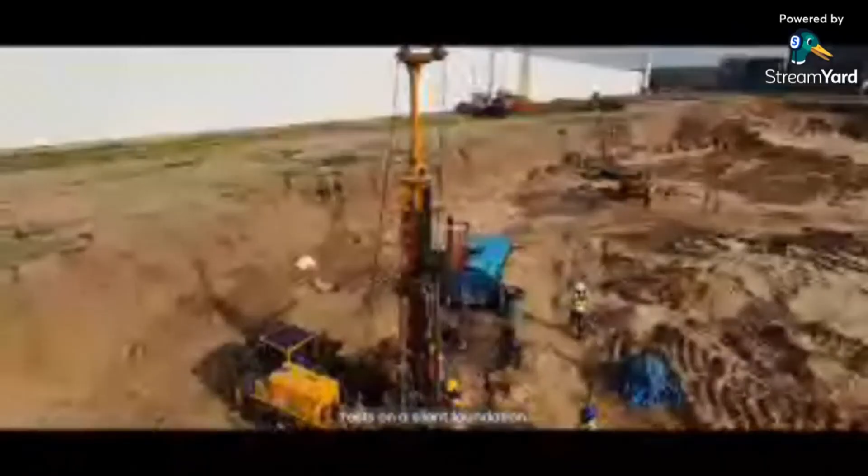Every metro line, every skyscraper, every bridge that connects lives rests on a silent foundation - a foundation that begins deep beneath the surface. And that's where we come in. CENGRS, Smart Geo Technics for better foundations.

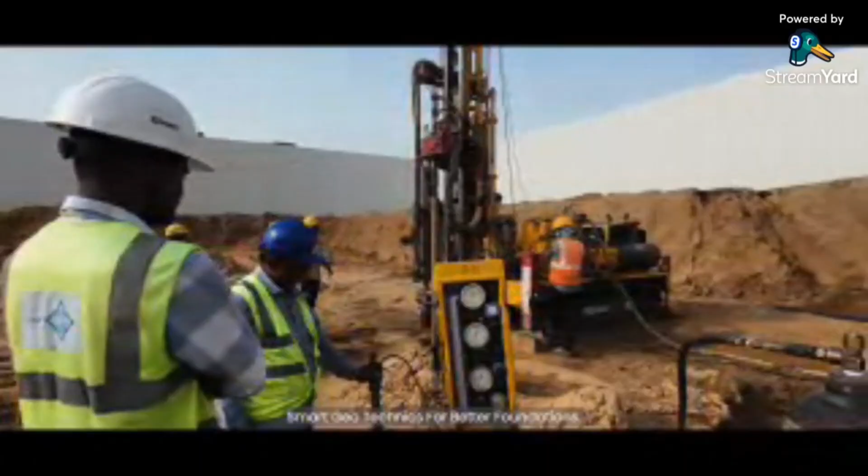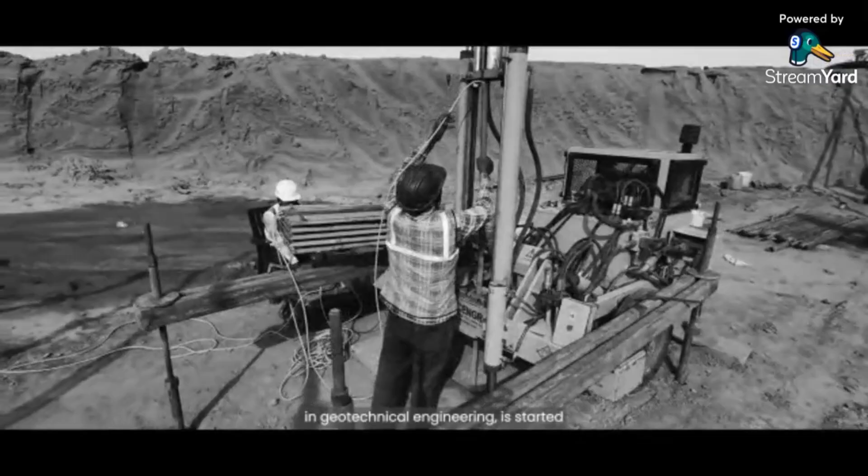Namaskar, my name is Sanjay Gupta. Right from 1971, I was employed in a job as a site engineer, then became a soil engineer, then senior engineer, and likewise. As a young, enthusiastic engineer with a passion in geotechnical engineering, I started as an entrepreneur, founding what is commonly known as CENGRS, that's Foundation Engineers. CENGRS is now 35 years young, with a vision to make geotechnical practice a specialist engineering service. CENGRS has been instrumental in upgrading the code of practices to improve geotechnical practice in society, in an effort to match international practices.

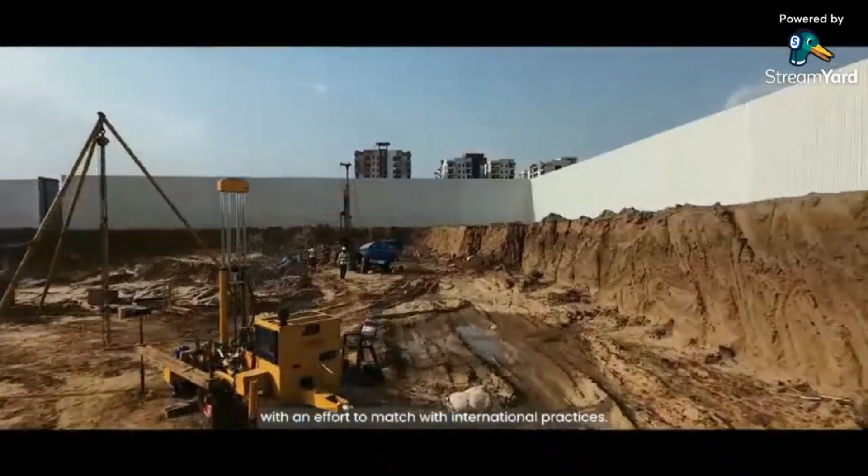Geotechnical engineering is a science, but its practice is an art. I always say something like, be a part of the soil, be its soul. That is what is an achievement, and it gives me the satisfaction.

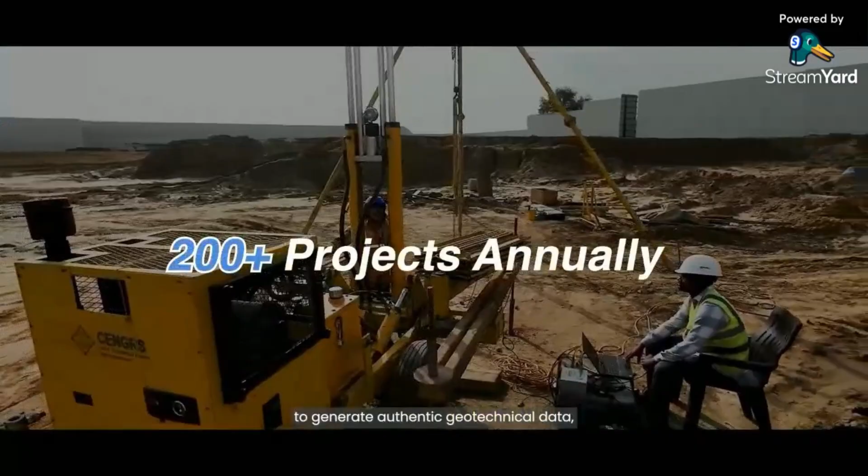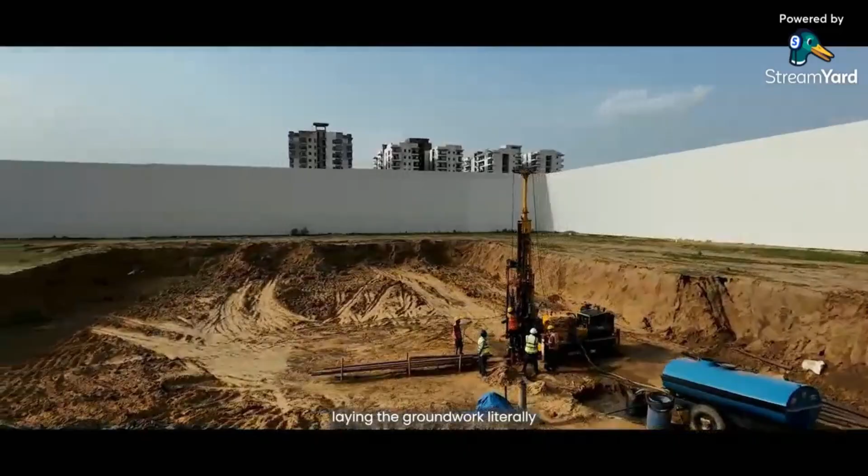CENGRS was built on a commitment to generate authentic geotechnical data, maintaining technical integrity and a deep sense of purpose. Over 3.5 decades, we've partnered with India's most ambitious infrastructure projects, laying the groundwork, literally, working for a stronger tomorrow.

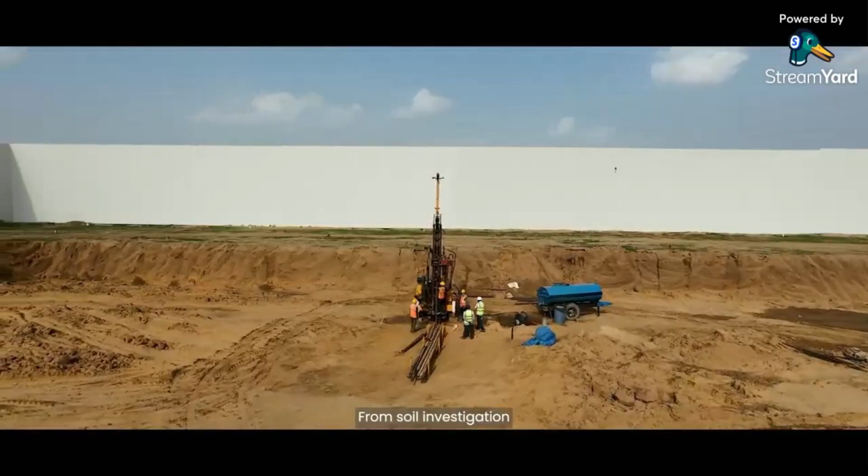I'm Ravi Sundaram, Director of CENGRS Pvt. At CENGRS, we are not just offering services, we are offering quality engineering. Our NABL accredited lab, our ISO certifications, our advanced testing equipment - from soil investigation to foundation testing, each step is backed by thorough and rigorous quality assurance so as to ensure the quality of data is trustworthy.

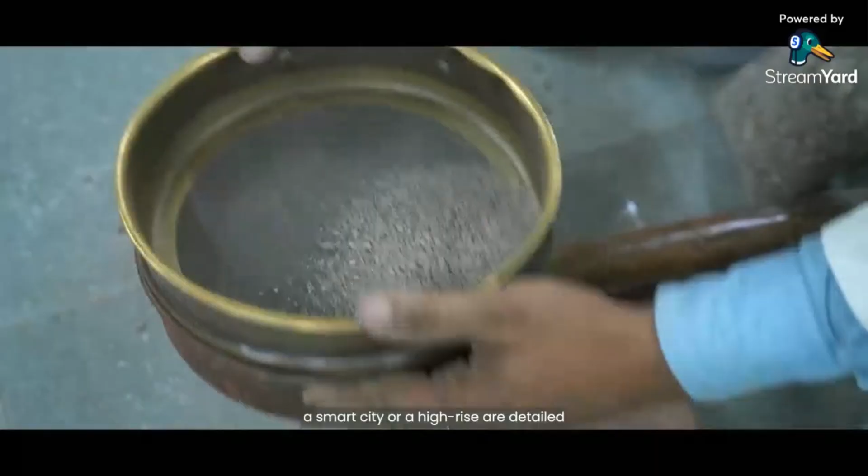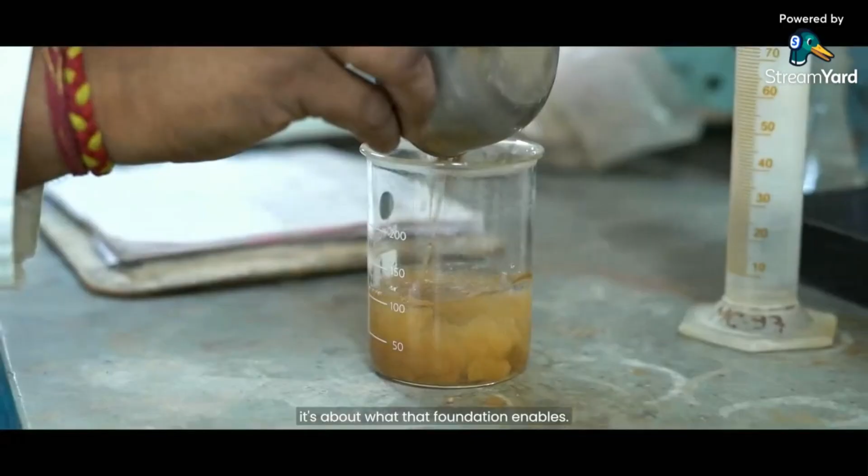Over the last 35 years, we have been building this trust with our clients and in professional circles. Be it a metro line, a smart city, or a high-rise, our detailed, data-driven approach ensures safe, economical, and sustainable construction. It's not just about what's underground, it's about what that foundation enables above the ground.

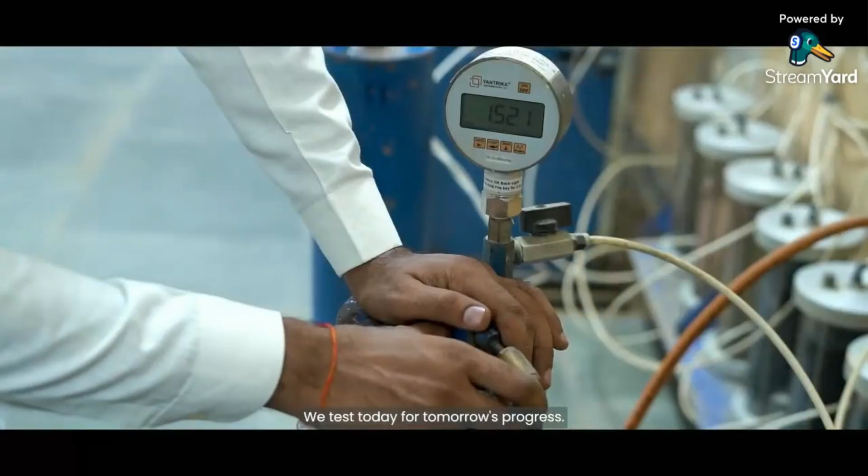Behind every data point is a human being. Our people are the foundation of CENGRS. From seasoned engineers to young interns, every mind here is tuned to solve challenges and deliver value. We don't just work for our clients, we test today for tomorrow's progress. And as the nation progresses, we take pride in our contributions to the projects executed and our humble achievements.

Hello, I'm Saurabh Gupta, Director at CENGRS Pvt. As the market leader, we have decided to transform the geotechnical engineering industry in India and bring it to world-class standards. To do this, we have implemented a system-driven approach so we can deliver consistent quality and on-time delivery for our customers. We are the first ones to bring in the latest ground technologies such as cone penetration test, pressure meter test, cross-hole seismic tests, etc., so we can unlock value and mitigate project risk.

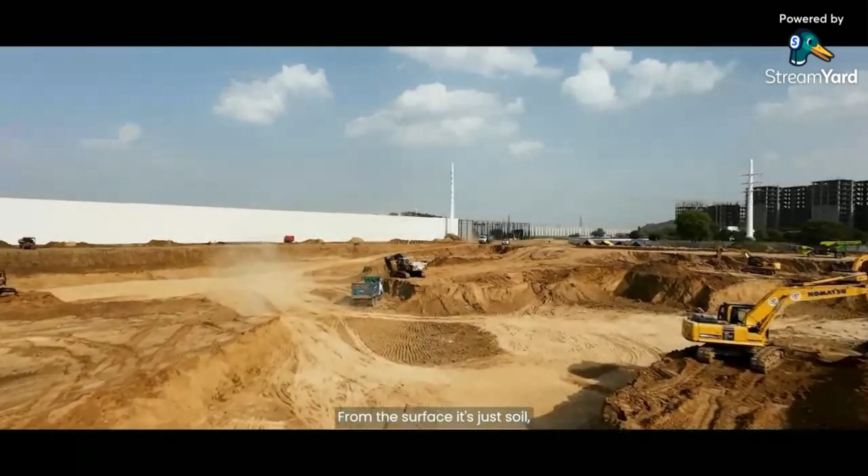As always, smart geotechnics for better foundations. From the surface, it's just soil. But to us, it's the beginning of possibility. CENGRS, Smart Geo Technics for better foundations.

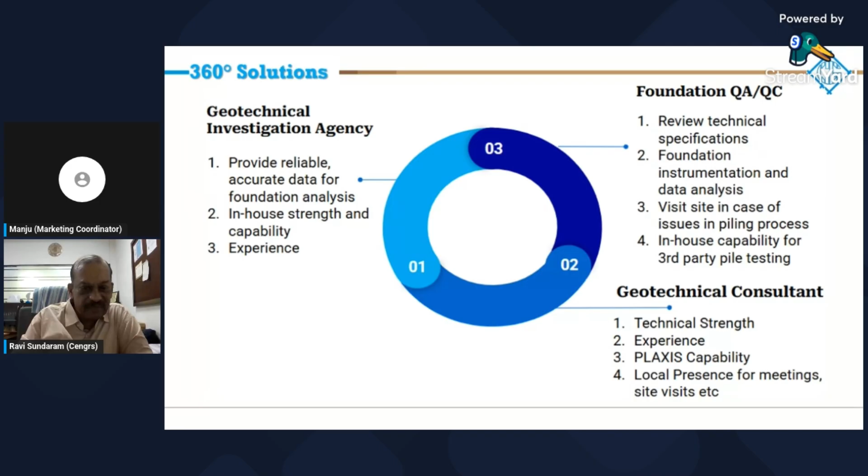We were the first geotechnical testing laboratory to get NABL accreditation, and we have a wide range of tests within our scope, both field as well as laboratory.

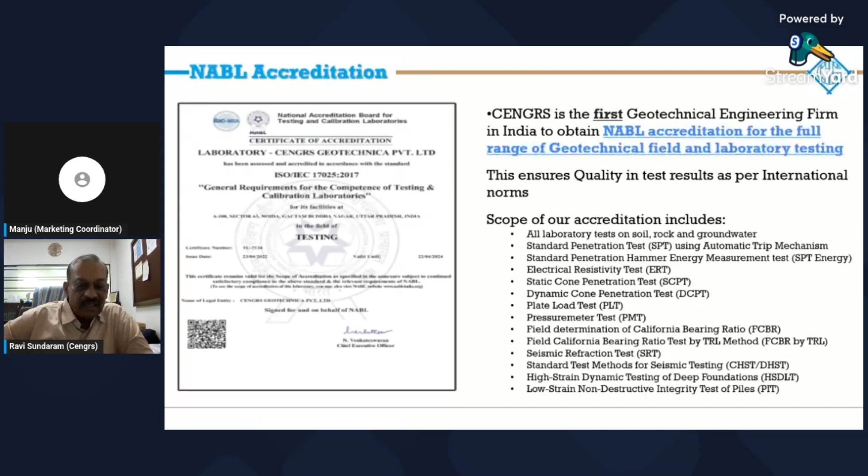We have a pan-India presence. We work all over the country. We have worked in the Northeast, in the South, West - Gujarat, Maharashtra, Tamil Nadu, Kerala, Andhra, Orissa. Right now we are working in Visakhapatnam. There are so many projects on which we are working.

Let us talk about advances in geotechnical investigations. What we have to be aware is that geotechnical investigation is not just about boreholes and SPT. SPT is not all that standard because it depends on the drilling and borehole technique, the type of equipment used, the test procedure, the operator doing the test, how much energy is transferred to the SPT head, the overburden stresses, the ground conditions, and various other limitations of soil sampling and transportation.

There are so many other parameters which influence the results. Now, as India moves forward, a paradigm shift is required in the way we carry out geotechnical investigations, and CPTu has been at the forefront of that.

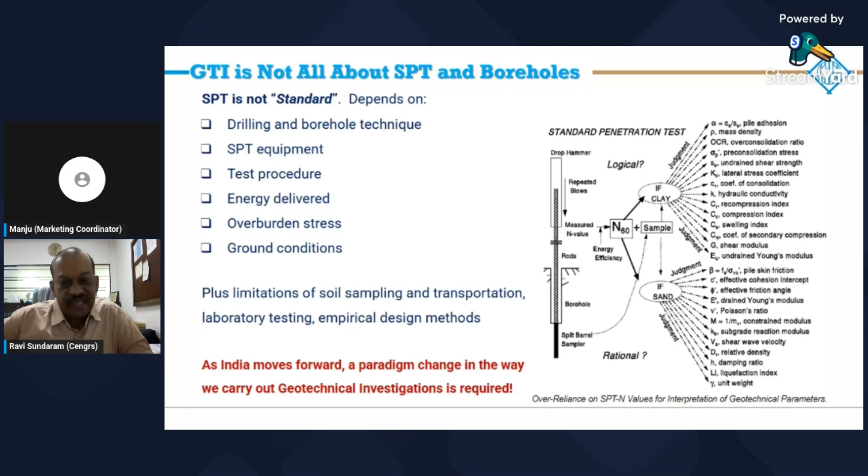In the past two decades particularly, geotechnical practices have undergone revolutionary changes. Conventional boreholes with SPT are now being supplemented with various other tests. The primary one is SPT energy measurement, so that you can standardize the SPT values to 60% energy transfer.

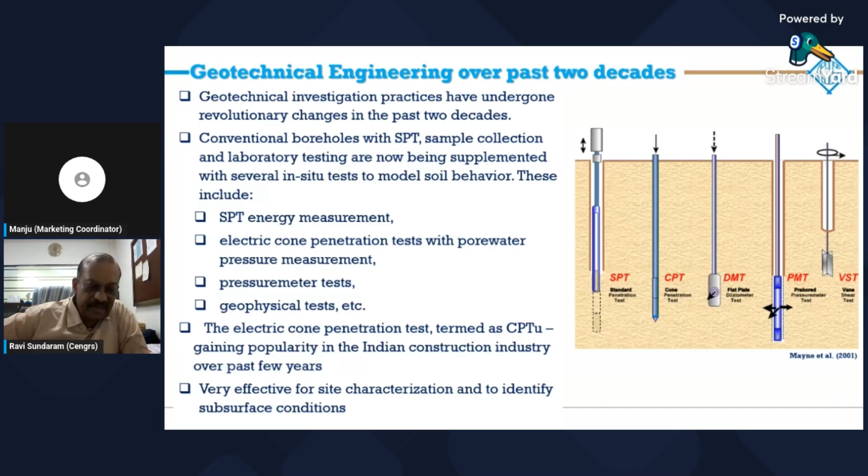The electric cone penetration test with pore water pressure measurement is another very important test which has been gaining currency in the country. A pressure meter test, geophysical tests - all these have really revolutionized the way geotechnical investigation is done. The electric cone penetration test, the piezocone, is gaining popularity in the country and has been used very effectively on many projects, so for site characterization it is very useful.

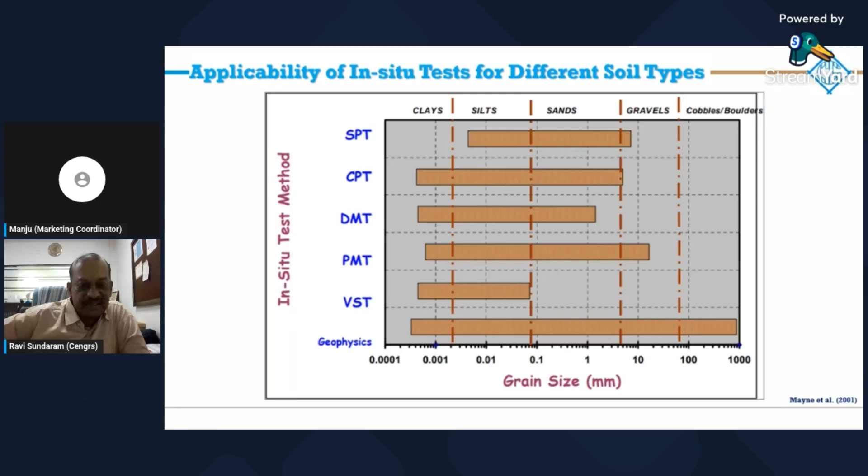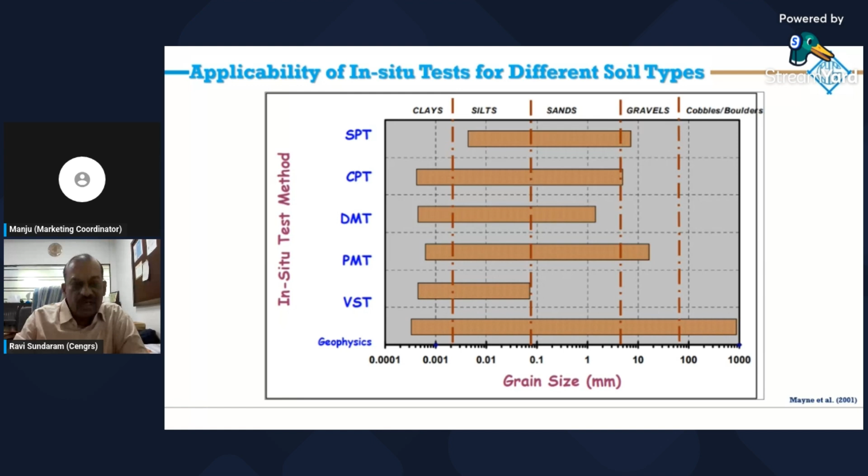If you look at SPT, it's applicable in most soils - of course gravels, it does not work. Most other tests work in all soils. A pressure meter is one test which can probably handle a little bit of soft rock and gravel. As far as geophysical tests are concerned, they are applicable in all kinds of ground, including gravels and cobbles.

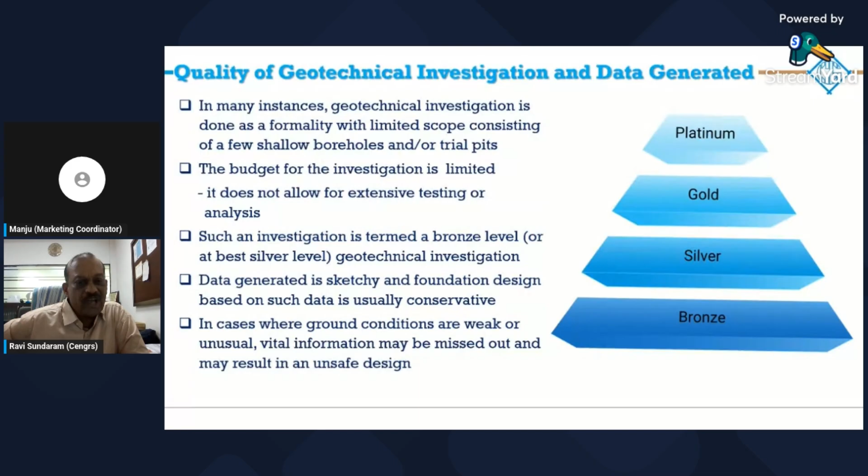What is most important is to understand the quality of the geotechnical investigation and the quality of the data generated. If you are going to do the investigation just as a formality, with a limited scope consisting of a few shallow boreholes or trial pits, and a very low budget for the investigation, it does not allow for extensive testing. What you get is poor quality data.

Such an investigation is termed a bronze level investigation. If you look at this pyramid here, this is the geotechnical output data pyramid - bronze is at the lowest. As you move up along this pyramid to the gold and platinum levels, you get much superior data.

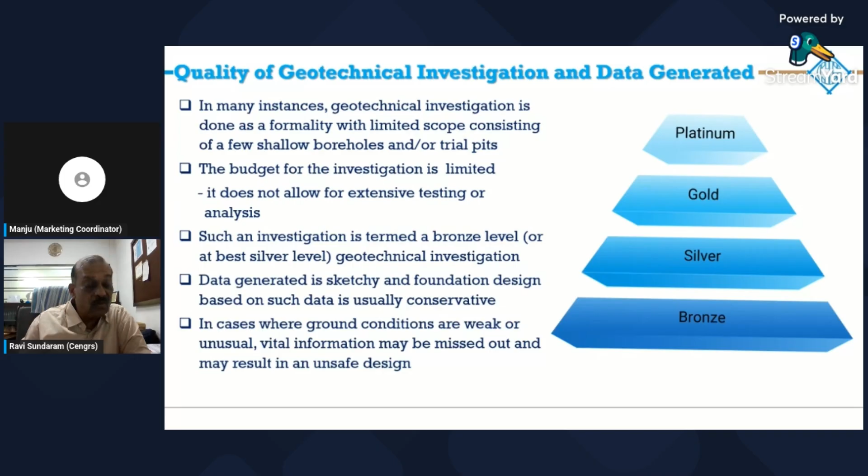At a bronze or silver level, data is usually sketchy, and foundation design is conservative. In some situations, you could miss out important or unusual conditions, vital information. This may result in unsafe design. So my advice - don't save on the geotechnical investigation scope. It could result in unreliable foundation design and high foundation cost.

Go for a gold or platinum level investigation irrespective of project size. This can make sure that you generate good quality data and greater reliability in the foundation design - a higher factor of reliability rather than a higher factor of safety. If you have data which is more reliable, even lower levels of factor of safety may do, and that could result in significant savings in foundation cost and time.

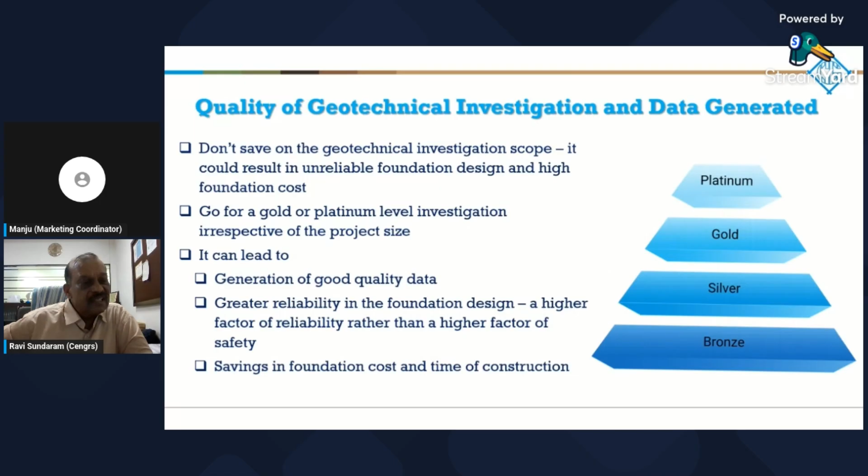Let me give you a little background on the electric cone penetration test. You have a cone which has a pore water pressure sensor, and the cone is pushed into the ground. It has a friction sleeve and a cone tip with the U2 level position pore water pressure sensor.

It gives you, as you push it into the ground, the cone tip resistance, the sleeve friction, and the pore water pressure. So you can interpret all these parameters very effectively and understand the cone resistance.

BIS has recognized the value of this test, and IS 4968 Part 4, the draft is already under circulation, covering electric cone and piezo cone penetration tests. We hope it will be released soon. The ASTM and ISO codes are already available. In IS 1892, the test has been recommended as suitable for investigation, but the detailed procedures of IS 4968 Part 4 will be published soon.

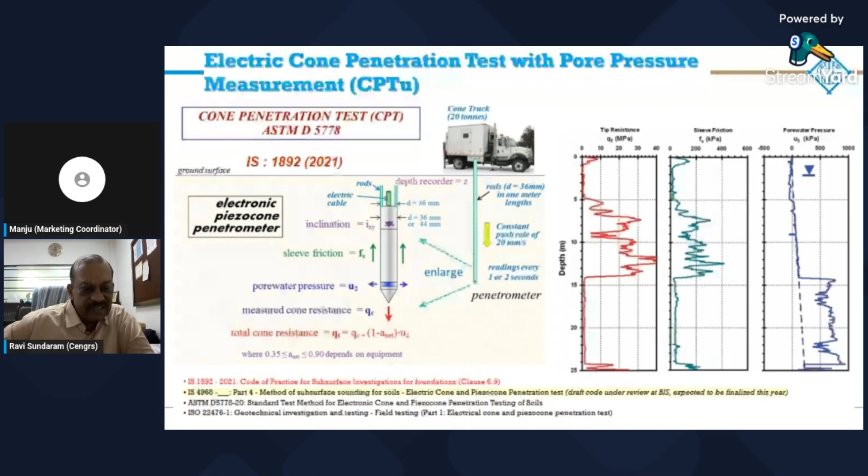It would be beneficial to use a cone with a 15 centimeter cross-sectional area, and the pore water sensor at the U2 position just above the cone.

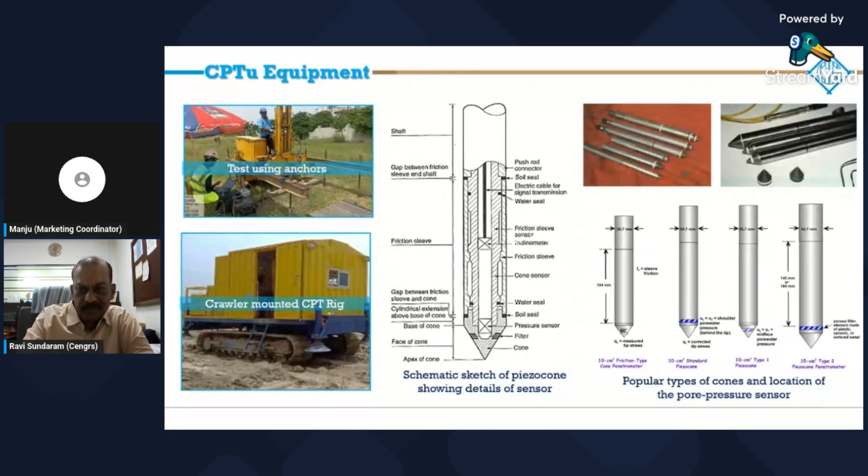Limitations include relatively high capital investment compared to conventional drilling rigs, and it requires a skilled operator who understands computer and data acquisition. There could be limitations if you are pushing into gravel or cemented layers, and of course, rock and boulders cannot be penetrated.

But in soils, whether soft clay or dense sand, you can get very good quality data. It will take time for experience to build up in the country, and for designer confidence to grow. But the advantages of CPT technology far outweigh the limitations.

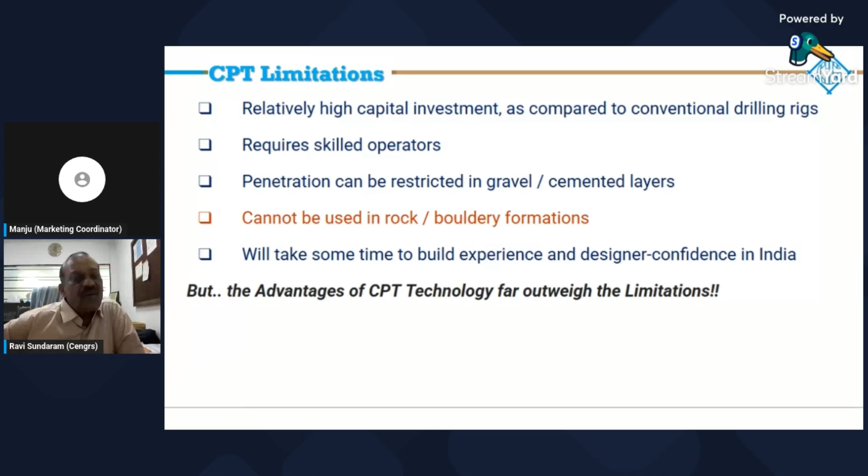So let's go for CPTu. What's the advantage? It's fast. You could get very quick results, 30 meters in just half an hour to 40 minutes.

You get nearly continuous data because of electronic data acquisition. There is no error due to operator related issues. So you have enhanced data quality, simple and reliable electrical measurement, continuous readings, and easy recording.

It's versatile, covering a wide spectrum of soils in which it can be done, and the geotechnical parameters that can be obtained from it.

It can go quite deep. Normal soils, it could go 30-40 meters, and in soft soils, it could go up to 100 meters. It's reliable and repeatable irrespective of the agency or equipment used, because the data quality is very reliable, 0.1% of the full-scale output.

You can do discrete sampling using CPT samplers, and it can be used to get various parameters like hydrostatic pressure, shear wave velocity, inclination, thermal resistivity, vision cameras, etc. These can be added as separate modules to the cone.

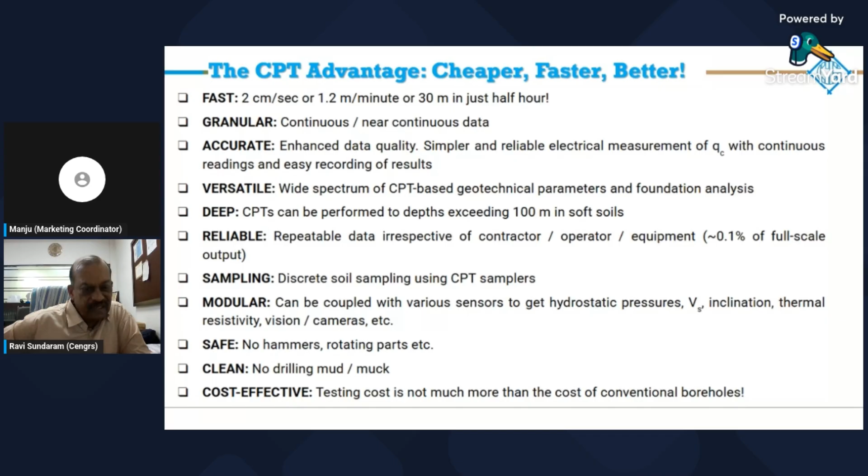It's safe because there are no hammers or rotating parts, clean because you don't use drilling mud, and cost effective. Testing does not cost much more than boreholes.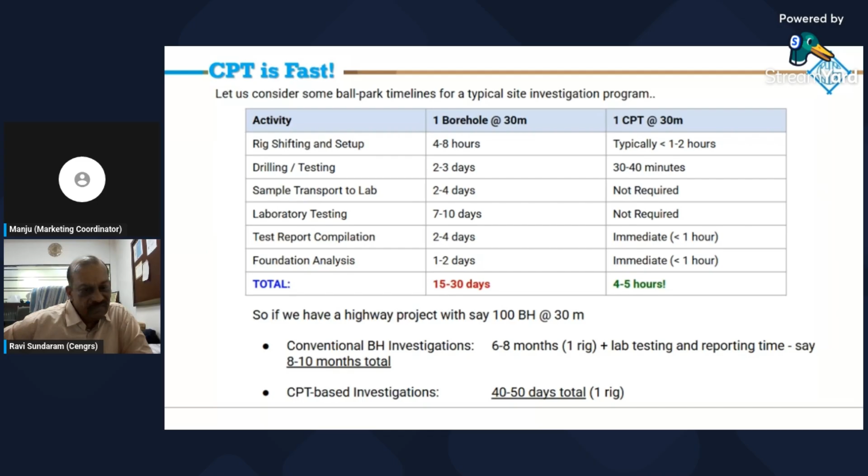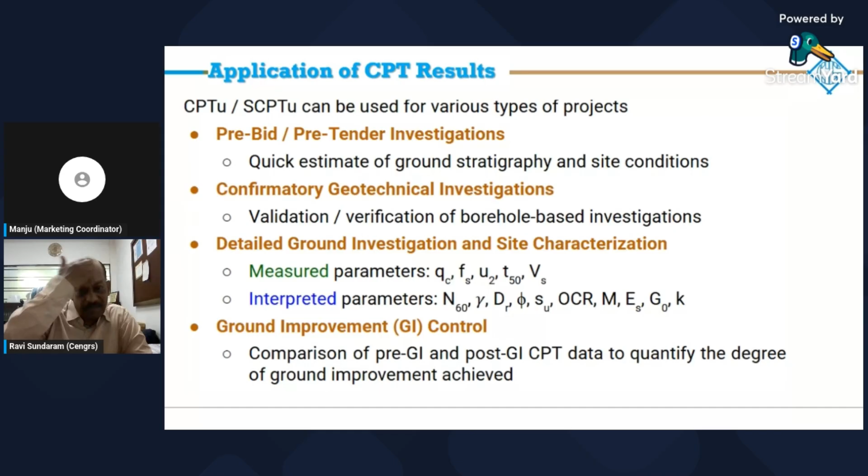You can interpret various parameters like N values, density, shear strength, and other interpreted parameters like C, phi, gamma, OCR, constrained modulus, shear modulus, and permeability. All these parameters can be determined.

And ground improvement control can be done very effectively using the CPT.

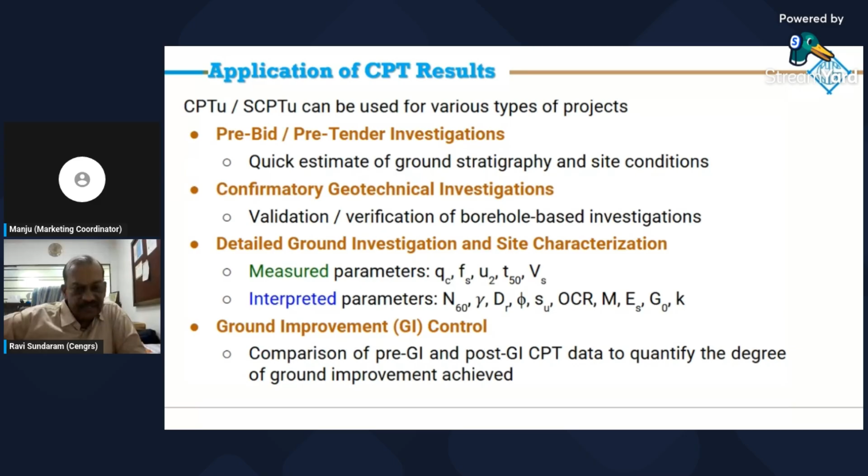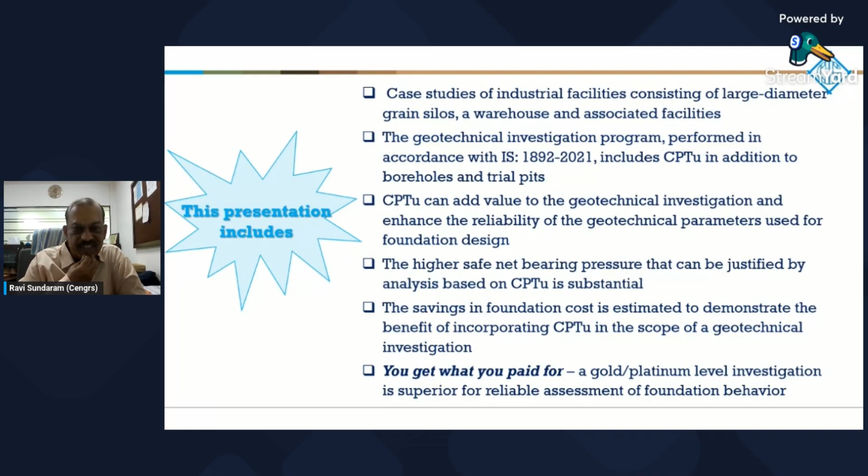Now I will present case studies for an industrial facility consisting of large grain silos, warehouse and associated facilities. The geotechnical investigation was performed in accordance with IS 1892-2021 and includes CPT in addition to boreholes and trial pits.

So we were able to add value to the geotechnical investigation, enhancing the reliability of the geotechnical parameters for use in foundation design. The higher safe net bearing pressure that could be justified by use of CPT is quite substantial, resulting in large savings in foundation cost.

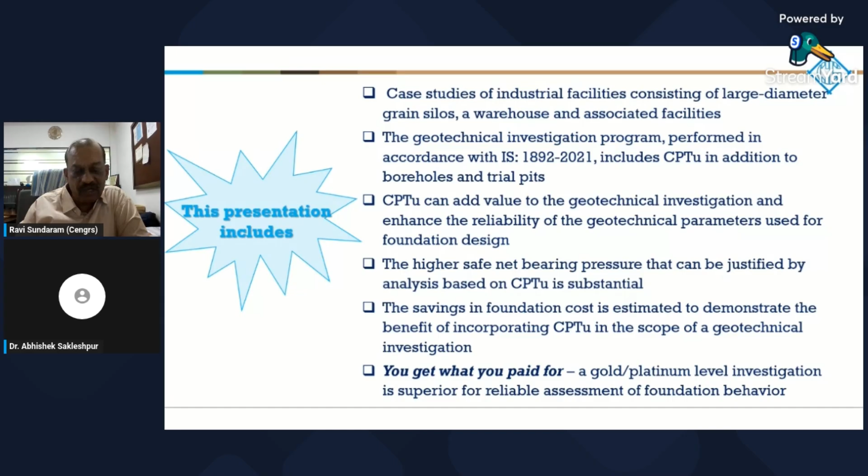And obviously you get what you paid for. A gold or platinum level investigation is superior and reliable, giving a very good assessment of the foundation behavior.

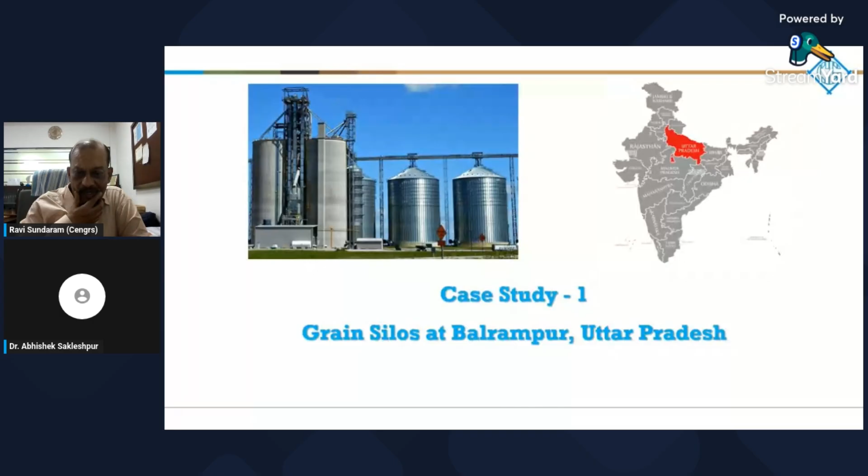So the first case is of a grain silo in Balrampur, Uttar Pradesh. The scope consisted of 2 boreholes to 30-meter depth, SPT at every 1.5-meter depth interval, collecting undisturbed samples, and measuring the SPT energy transfer so we could correct to 60% energy correction. Cone penetration tests were also done.

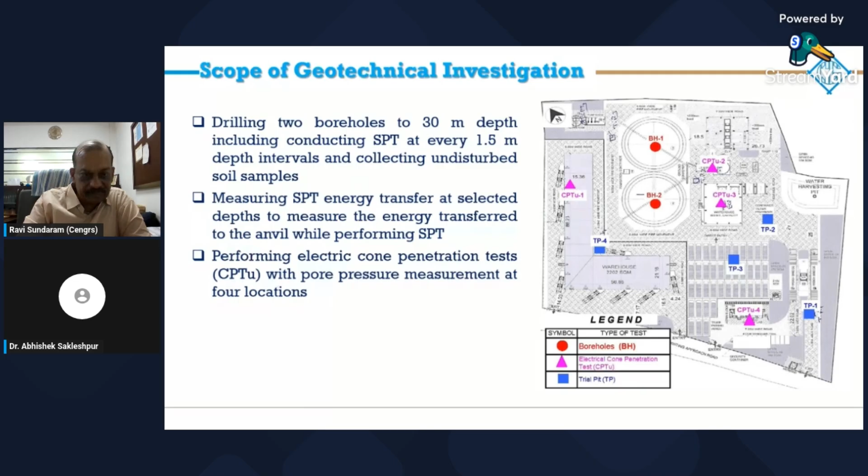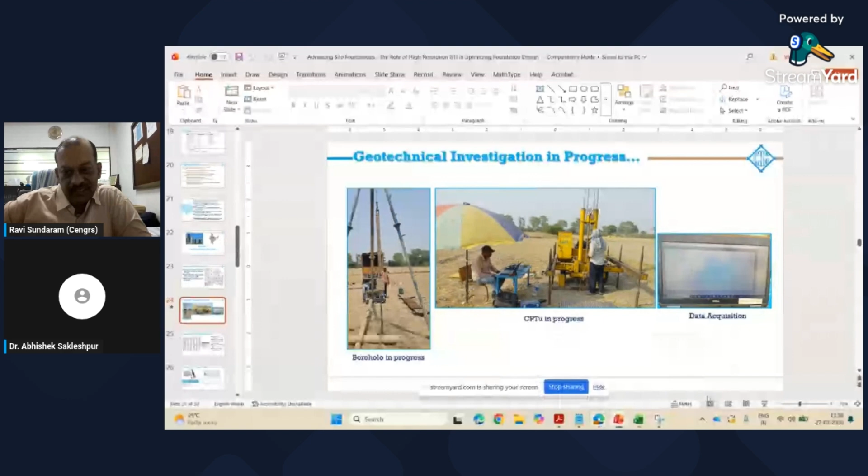So you can see the stratigraphy as interpreted from the boreholes, and also what was interpreted from these 4 CPTs. You have a top layer up to about 10.5 to 11 meters, consisting of sandy silt of low plasticity, and below that you get silty sand.

Groundwater was at about a 4.2 meter depth. You can see the N values corrected for energy in the top layer up to about 3-4 meter depth. You get N values in the range of 8 to 10 at some locations, and particularly at the silo locations, increases to about 17, 18 in some other locations. Deeper soils are quite competent.

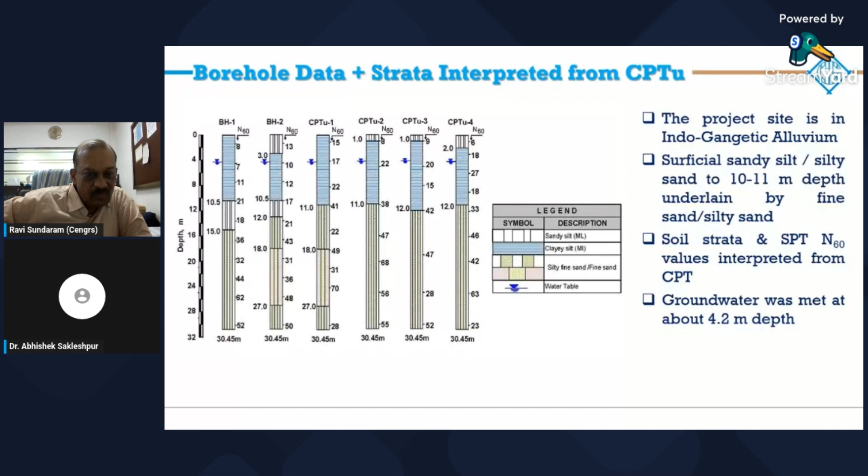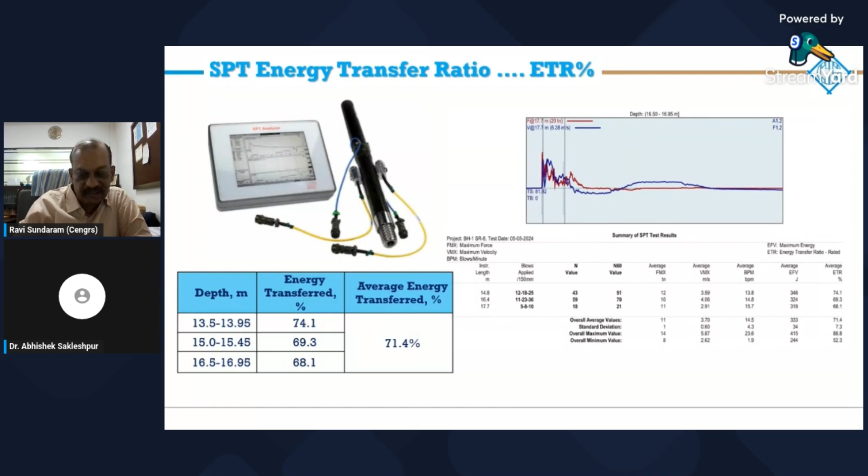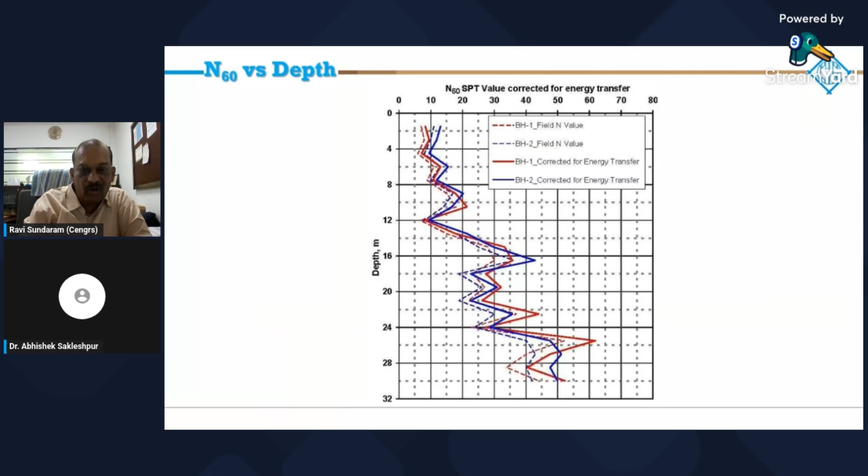SPT energy was measured using the SPT energy analyzer. So what we got was an energy transfer of about 71.4%. The SPT energy N values were corrected for 60% energy transfer, and you can see the blue line here shows the corrected energy, corrected for 60% energy transfer.

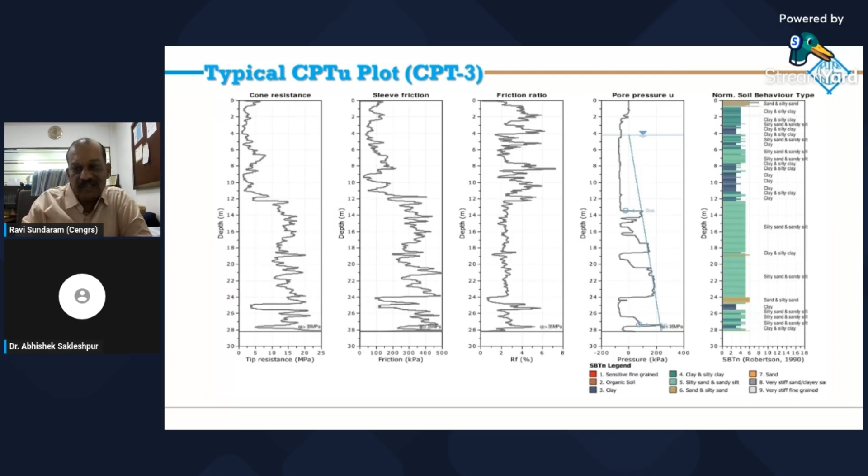A typical plot of one CPT, you have the cone tip resistance, sleeve friction, friction ratio, and the interpreted soil type. We could interpret various soil parameters like the equivalent N60. You can see the comparison with the measured N values - fairly good comparison at shallow depths, slightly more scattered at the deeper depths.

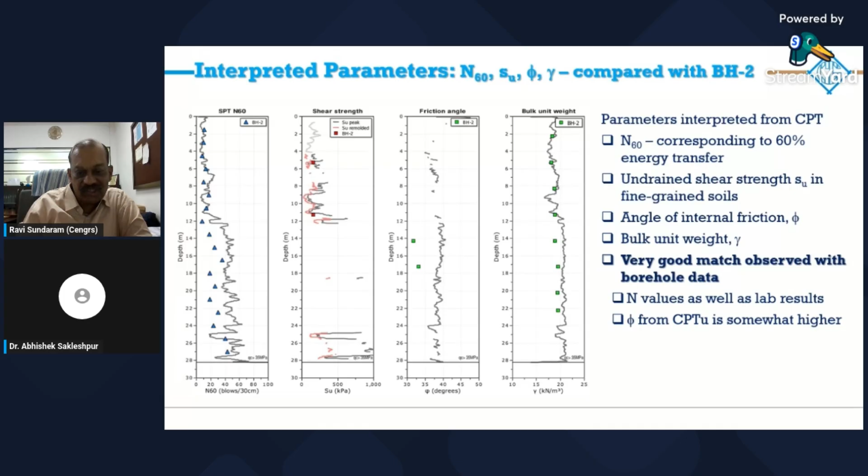The shear strength in the top soils matched very well with the lab results. The friction angle and the bulk densities were also measured. The density values also show quite good comparison. The friction angles measured by the CPT are somewhat higher.

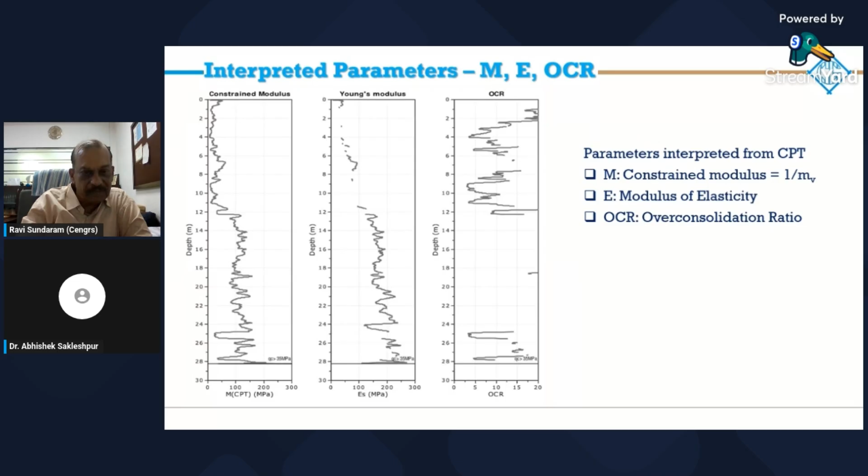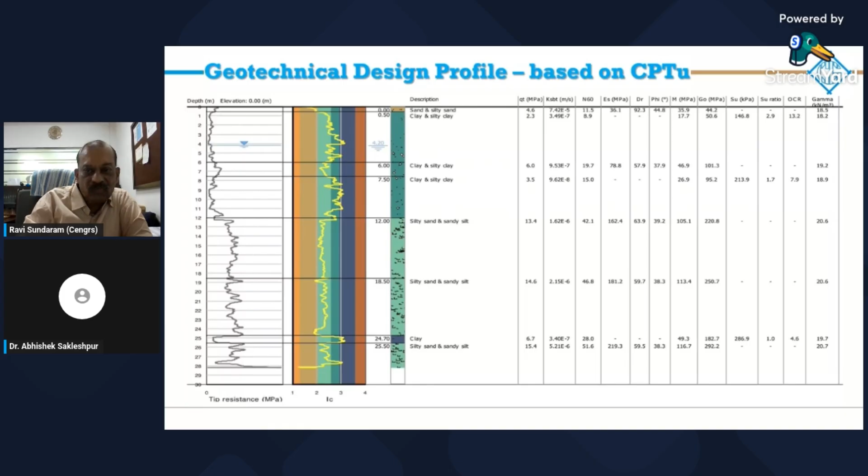The constrained modulus, the Young's modulus, the OCR - all these parameters could be interpreted from the CPT. This is a geotechnical design profile based on this CPT. The top half a meter is a silty sand. Below that you get clay to about 7 to 12 meter depth, then you get the sand layers. Below 24.7 there is a thin clay layer, and below 25.5 again you get sand. Various parameters were interpreted from the CPT.

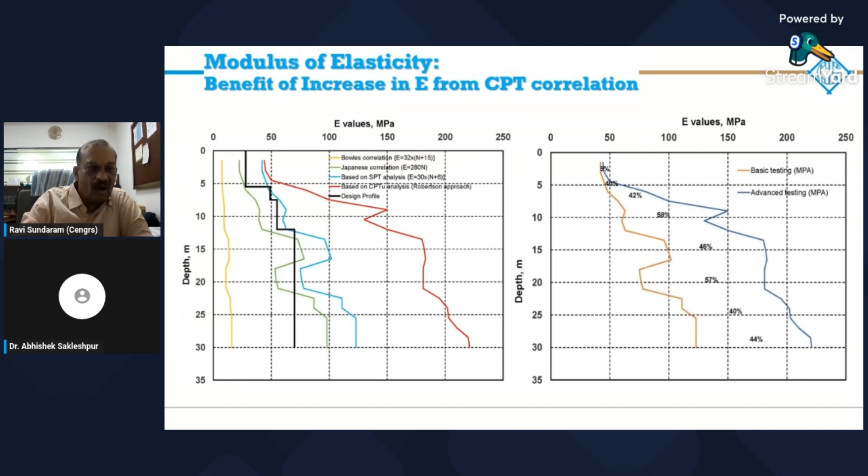The E values were interpreted from the CPT. You can see the benefit of increase in the E values from the CPT correlations. So we could get much higher E values - nearly up to a 40-50% increase in the E values for design, which means you predict much lesser settlement.

This is the bearing capacity analysis for a 3 meter by 3 meter and 6 meter by 6 meter square foundations at 2 and 4 meter depth. You can see a comparison from the shear criteria at 2 meter depth - the values increase from 230 to 400 kPa. The settlement criteria, again from the CPT, shows the pressure increases substantially, representing a 74% increase in the safe bearing pressure.

A similar comparison is for a 6 meter by 6 meter foundation - you get a 48% increase in the computed safe bearing pressures. For a 32 meter circular raft, the analysis shows we were able to increase the SBC 100%, from 110 to 220. This meant that ground improvement was not required here.

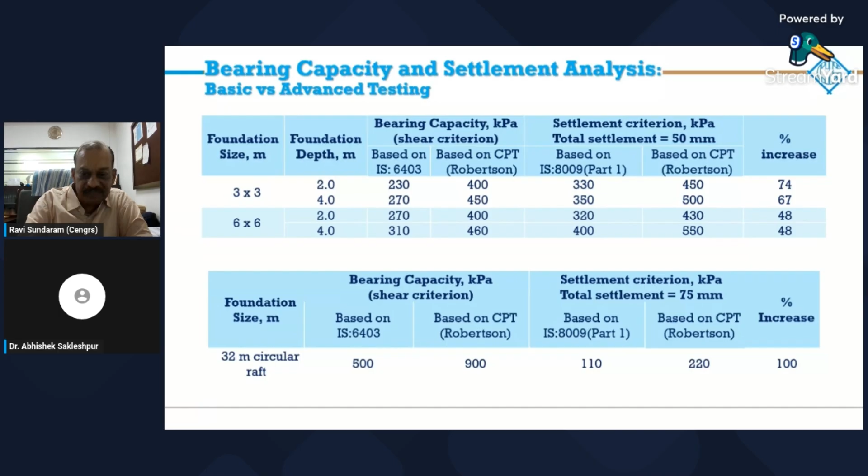This is a comparison of the values here. You can see what you get at 2 meter and 4 meter from the CPT as well as from the conventional analysis. This is for a 6 meter by 6 meter size raft - again, you can see that CPT gives you much higher values.

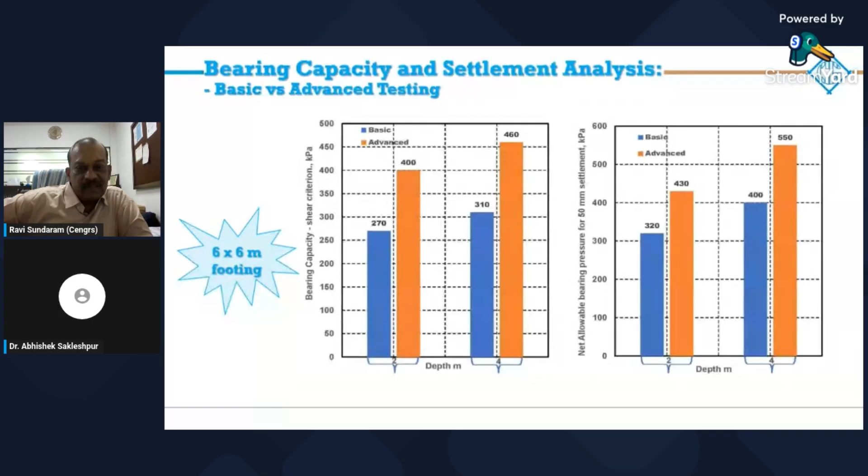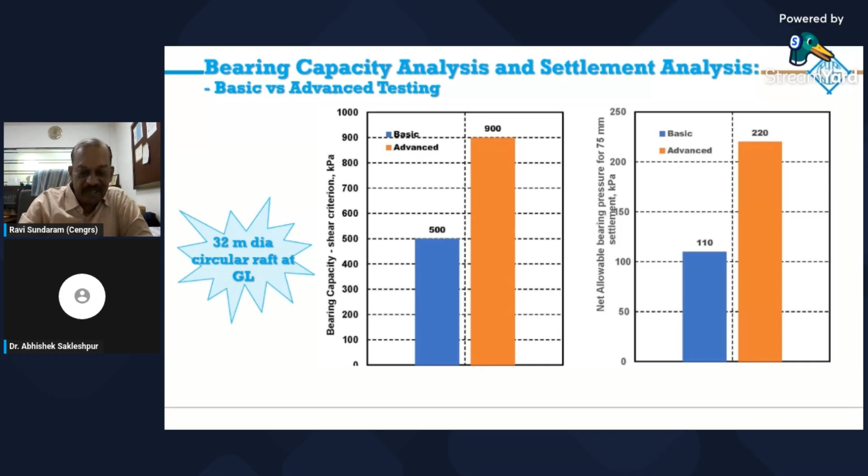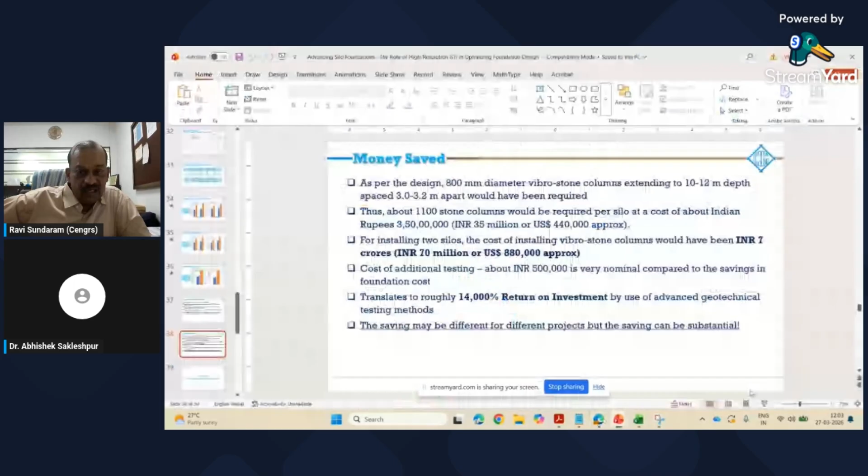And this is for the 32 meter circular raft for the silo. This was giving an allowable 100% increase in the SBC values. So we could use these much higher values for the design of the foundation. There was a huge saving in the foundation cost - we could really save quite a bit. The conventional analysis was showing only 110 kPa.

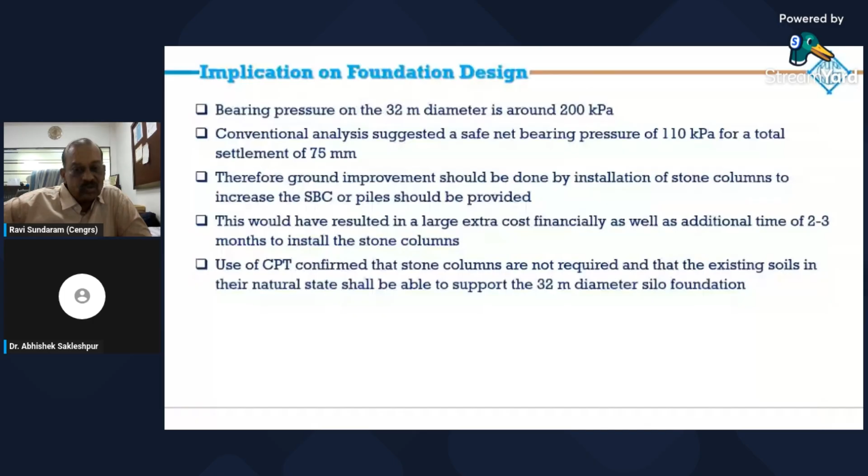So ground improvement would have to be done. Also, these stone columns would have resulted in an additional 2-3 months for installing the stone columns. So the CPT confirmed that stone columns are not required. And as I told you, the saving was nearly 14,000% on the return on investment - what you could save by doing a few CPTs. The saving may be different for different projects, but on each project the saving can be substantial.

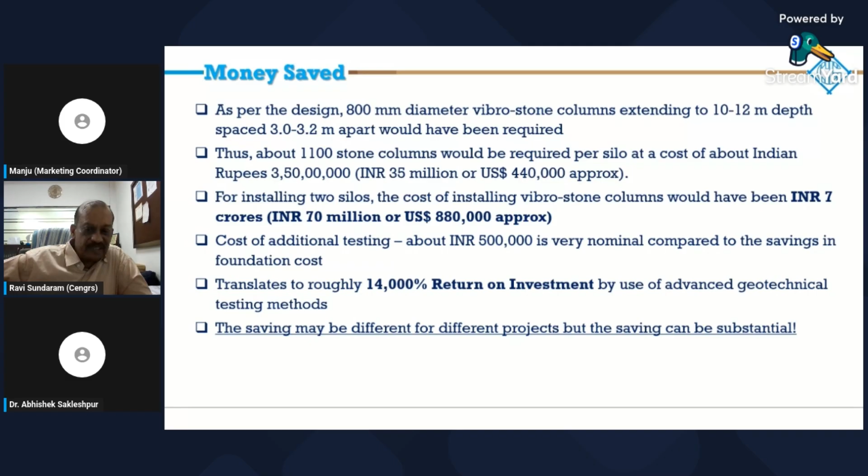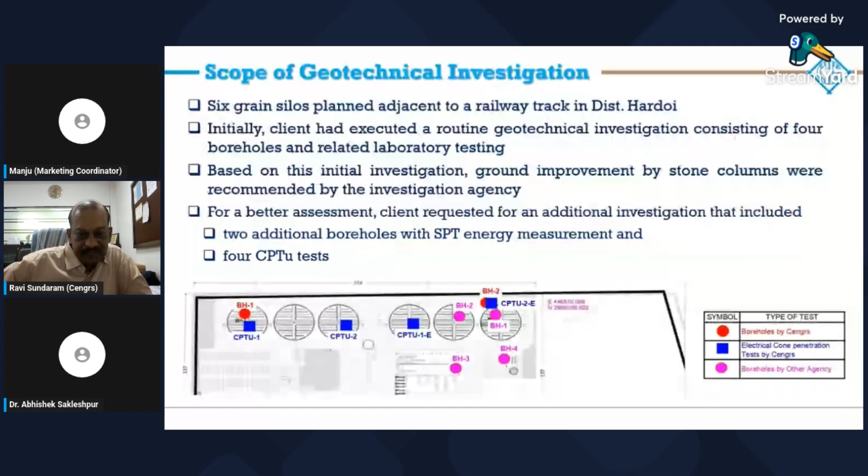So this is another project in Sandila, Hardoi district - 6 grain silos adjacent to a railway track. Now additional CPT was done, and SPT energy measurement was also done here.

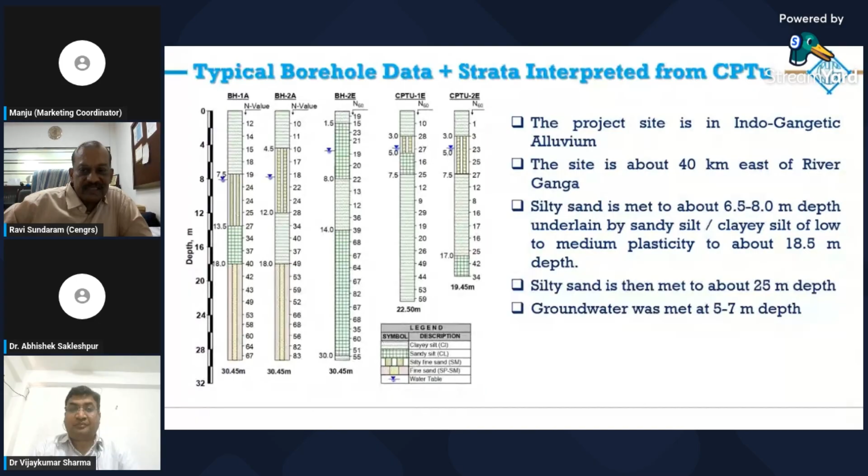So the site here is in the Indo-Gangetic alluvium, just 40 kilometers east of the Ganga River. Here you primarily get a sandy silt of low to medium plasticity, underlain by silty sand below about 18-25 meters. Groundwater was at 5 to 7 meter depth.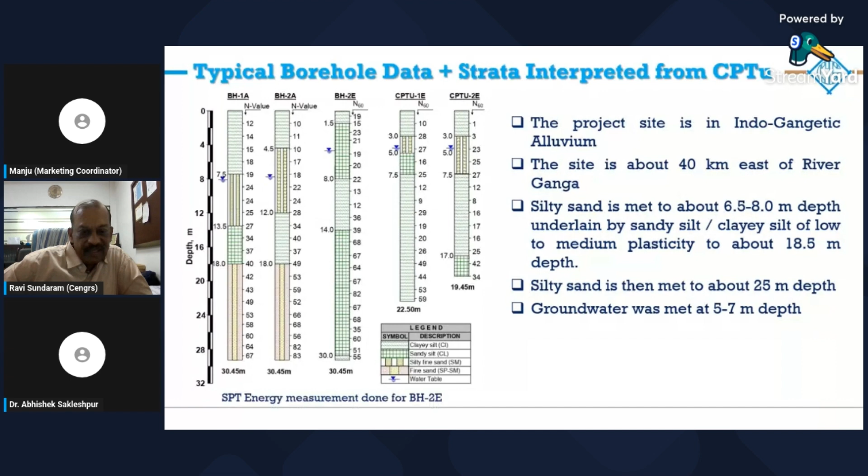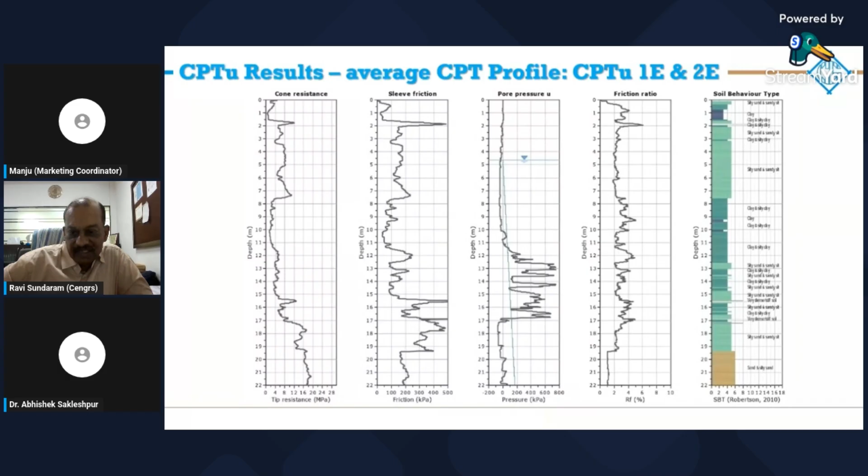SPT energy measurement was done, and then the CPT was done. This is typical profile showing the cone tip resistance, sleeve friction, friction ratio, and of course the pore water pressure, and the SBTN soil classification.

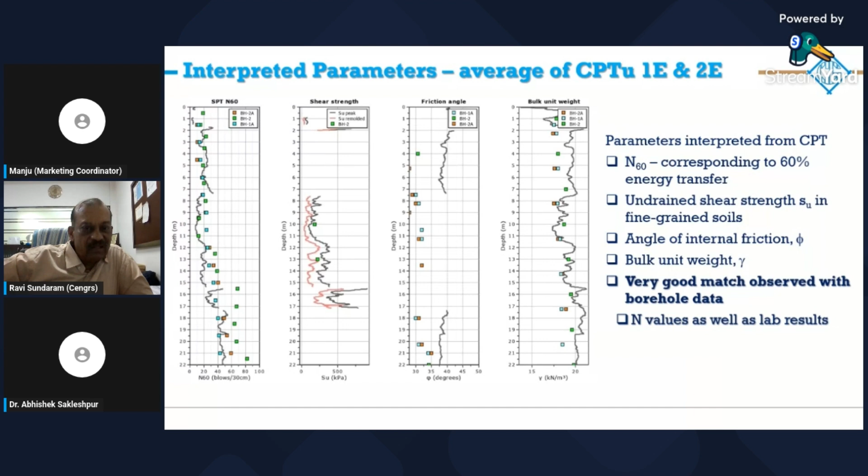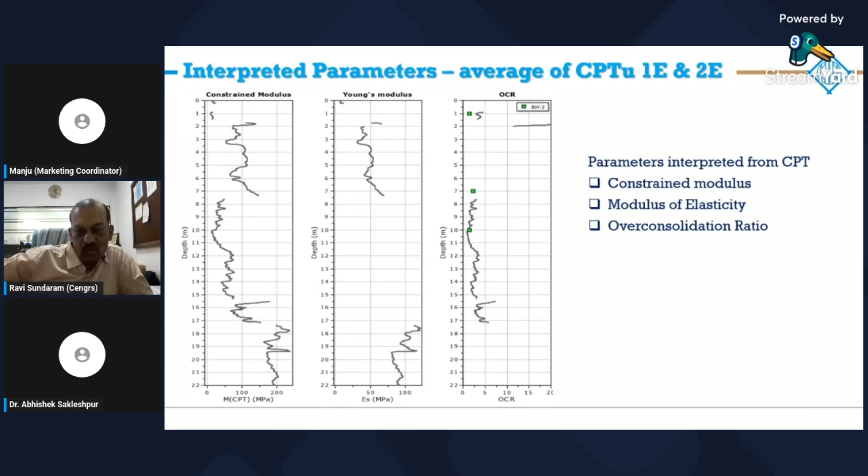So the parameters interpreted include the SPT, shear strength values, friction angle, bulk density, etc. All these parameters we could get very good match. Constrained modulus and Young's modulus, and of course the OCR gave me good comparison.

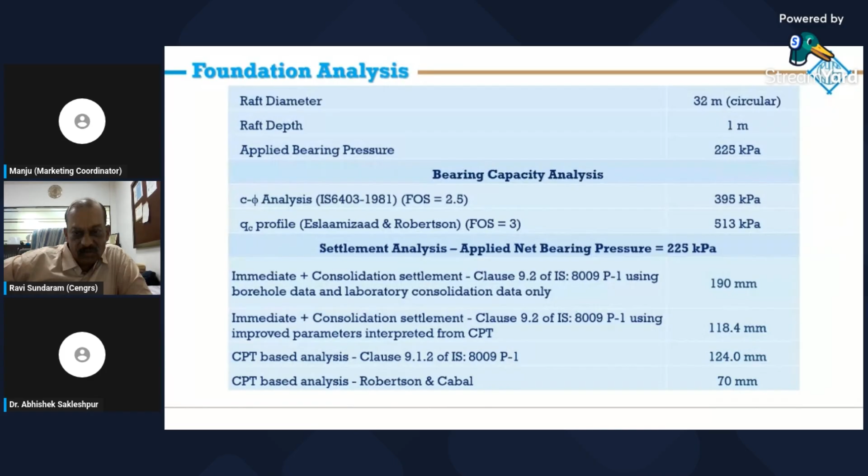But settlement analysis, the conventional analysis gave me 190 mm settlement, which was not tolerable. But the CPT proved to me that you could probably get much lesser settlements. The conventional analysis from CPT showed 118, whereas the Robertson and Cabal based analysis from CPT showed only 70 mm settlement. So this was another case where it was decided that ground improvement is not required.

So you can see what the results were. CPT based analysis showed me just 70 mm for the 32 meter raft.

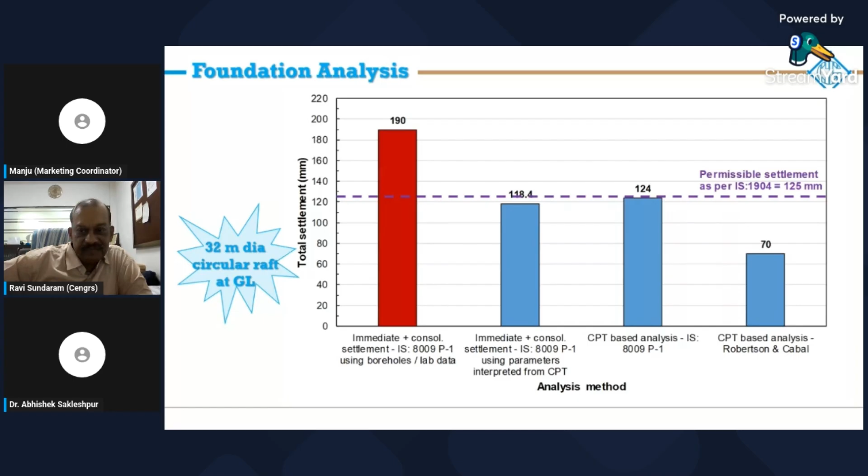So the foundation settlement estimated using the conventional laboratory consolidation data is 190, but what we could get from the CPT data is much lower. And because the IS code permits up to 125 mm settlement for rafts on plastic clay, it was decided that there was substantial saving in the foundation cost by use of CPT here.

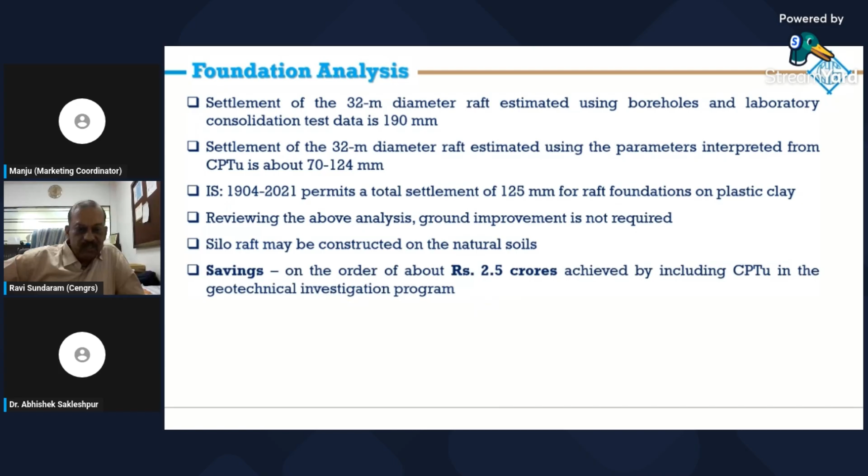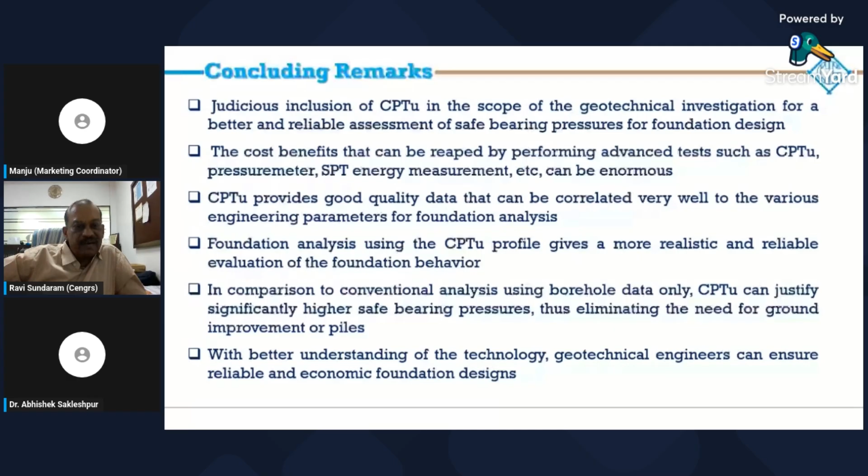So with this, I would like to conclude this presentation. Judicious inclusion of CPTu in the scope of geotechnical investigation for a better and reliable assessment of safe bearing capacity can be very useful, and the cost benefits that can be reaped by performing CPTu, pressure meter, SPT energy measurement, etc. can be enormous. CPTu, of course, provides very good quality data.